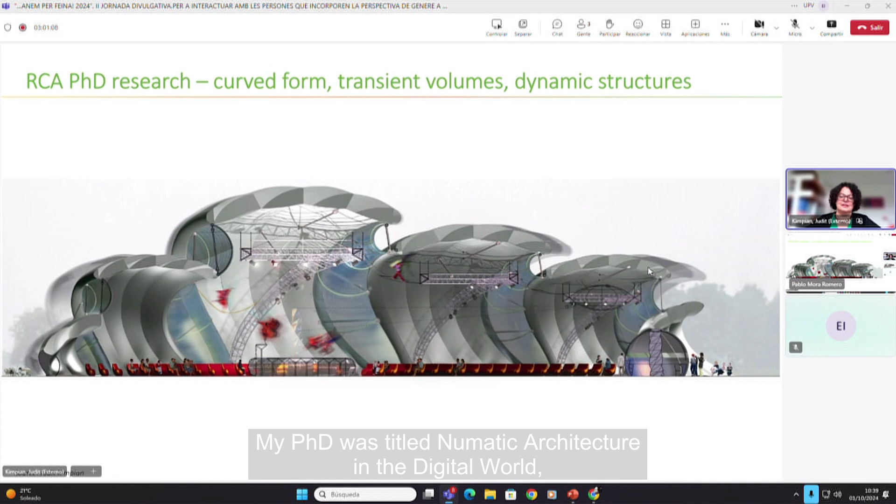So I started as an aspiring young architect looking at changing the world with quick fixes, as we like to do, creating spaces that are ephemeral, transient, easy to erect and dismantle. My PhD was titled Pneumatic Architecture in the Digital World, and it was a project-based PhD at the Royal College of Art. So while I was researching my PhD, I also worked freelance, putting my hard-earned digital skills into use to design and also manufacture sort of event architecture, exactly the spaces that I was researching.

At the end of the 1990s, you could say the architectural community was absolutely seduced by curved form. It was the first time we had the structural and the digital tools to imagine, control and build these things. I was absolutely fascinated as well with how the brain is fine-tuned to detect any changes in curvature, and why our brain is so seduced by big curves. Of course, it relates to biological issues. For example, the brain is very finely tuned to detect very minor changes of curvature and to attach meaning to them. You can imagine why that is so important.

Just interestingly, symmetry and asymmetry. A lot of biological structures are symmetrical, especially the higher organized ones. So the brain attaches an immediate sense of a living object to anything that's symmetrical. In architecture, when we use curved buildings, we often try to veer away from that.

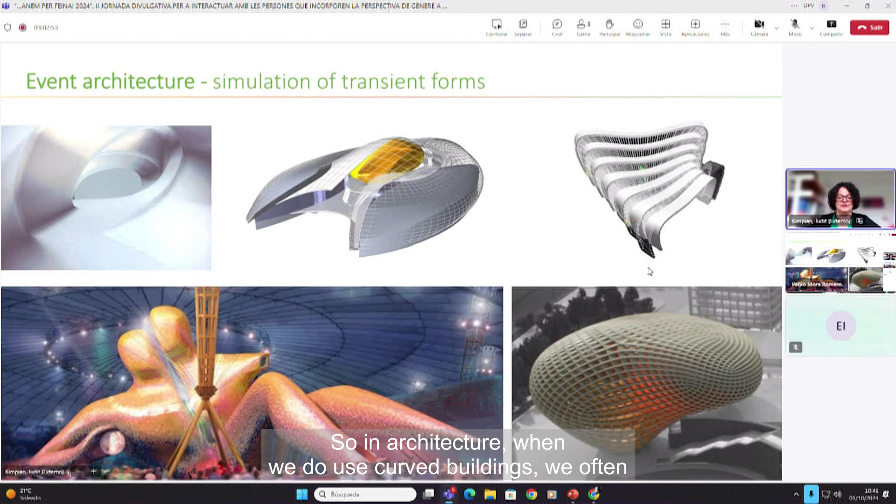Not in this case. When I worked at Foster & Partners after finishing my PhD, in the R&D group, I worked on many projects, but this was one of my favorites, because manufacturing curved form became really a possibility with digital tools. As a team member in advanced modeling, I was also simultaneously leading the implementation of basic solar and environmental analysis into the practice workflow. I had the privilege to work on this building from its very inception, so you'll see the initial computer model and then how we generated the physical model from that.

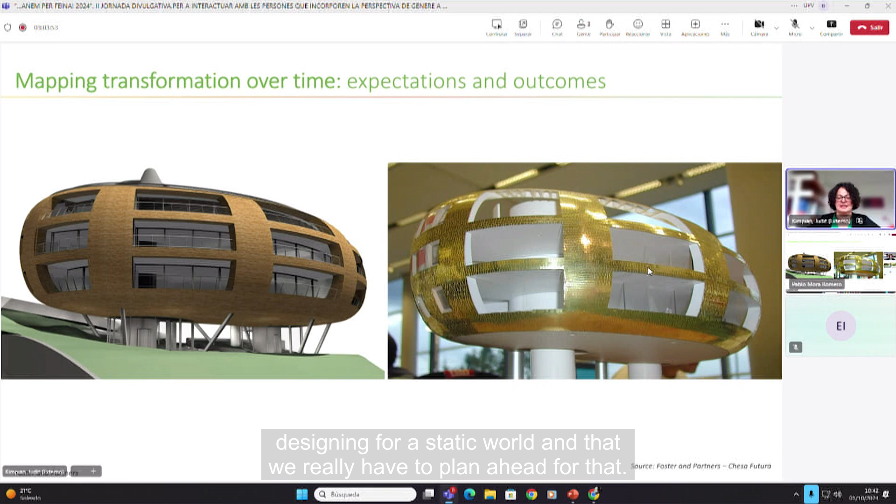Two decades later, it is a profound expression of how we are not necessarily designing for a static world, and that we really have to plan ahead for that.

So guess what's causing the patterning on the building on the right-hand side? The building was covered in shingles, and of course the solar radiation over time causes the graying of the shingles. But on the other side, you can see where the direct solar radiation doesn't hit the building anymore. Apparently Norman loves the look, but it's certainly not something that anyone anticipated.

So how do we plan for imagining buildings in an environment that is not static?

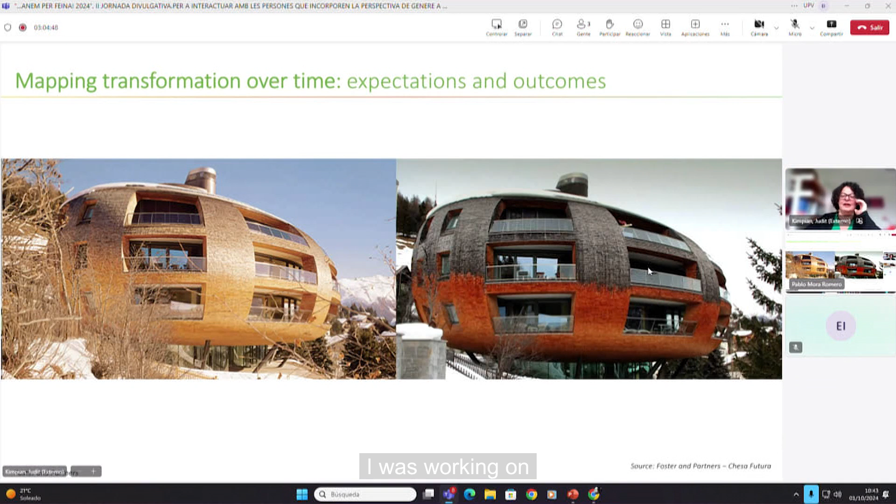My next step in terms of my career still remained with the manufacturing of curved form. I was working on this project called Dubai Metro when I became head of advanced modeling at AHR. I was in charge of the digital design and engineering coordination of 24 Dubai Metro stations.

You can talk about the animation of these projects - every single one of these stations was different. I got quite hooked on controlling these differences through digital models, which allowed me to get design decisions approved and executed, and got away with a 30-meter cantilever.

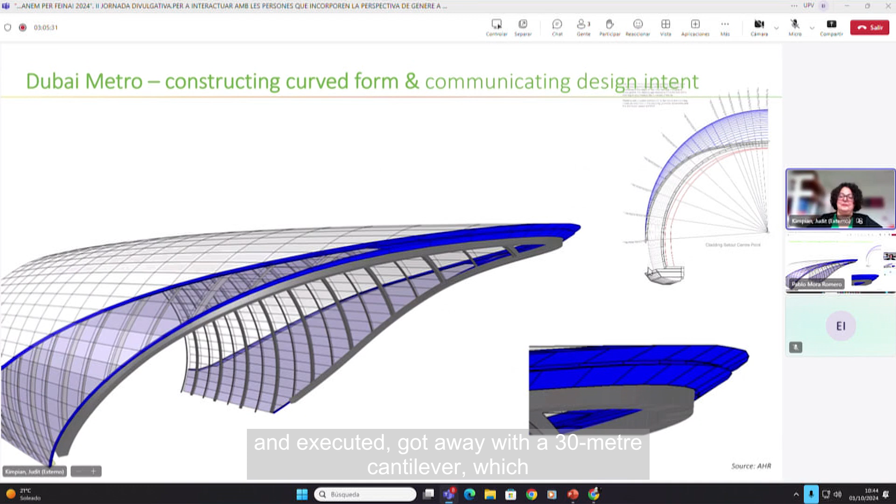You can see some of the changes in the model shape as the building animated through its development. And of course, there's nothing like standing on top of that 30-meter cantilever and checking, in 40 degrees heat, if the curvature was correct.

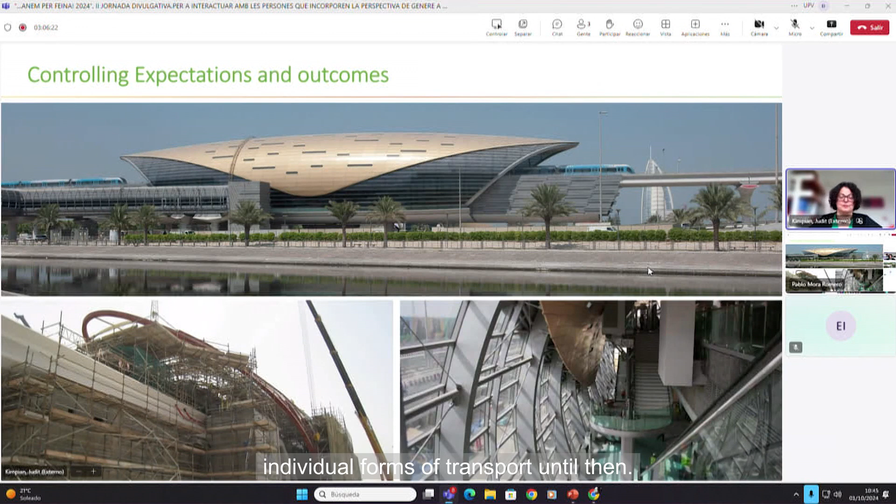But it was a wonderful project to work on because we were able to create an absolutely positive icon. It was a daring project, and it was quite difficult to get away with this form and adapt it to the different situations. It was a public project for public transport, in a country that only had individual forms of transport until then.

Then I started working with my colleague Abdulmajid Karanouh, who actually now lives in Dubai. I worked with him on Dubai Metro, and he went on to lead the design of the Al Bahar Towers in Abu Dhabi, which includes actual moving structures. Designing this building was kind of the culmination of our exploration into animated structures.

And then I noticed I always ended up being either the sole woman with 3 people, 30 people in the room, 300, or in this case on site with 3,000.

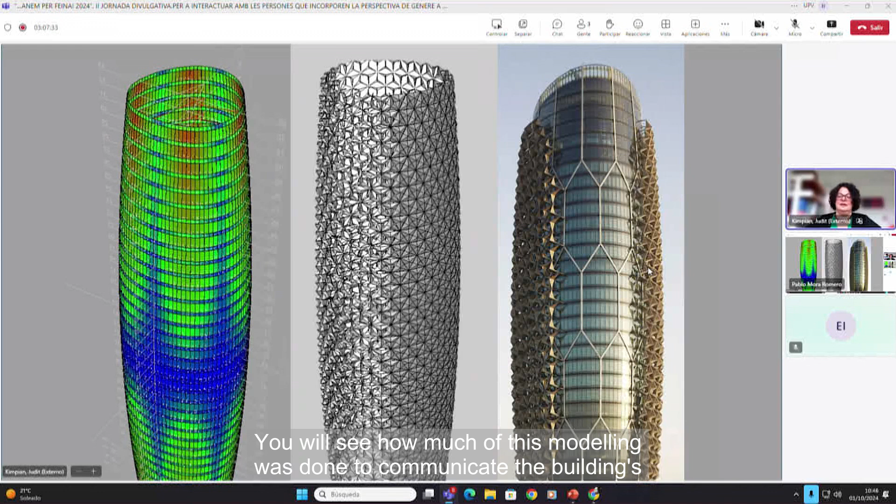I wanted to also point out how much precision-led process there was leading up to this, and the control. I keep coming back to this word of control, because it's not just a personal issue, but what we can control, we can build. So you will see how much of this modeling was done to communicate the building's form and its performance and its details.

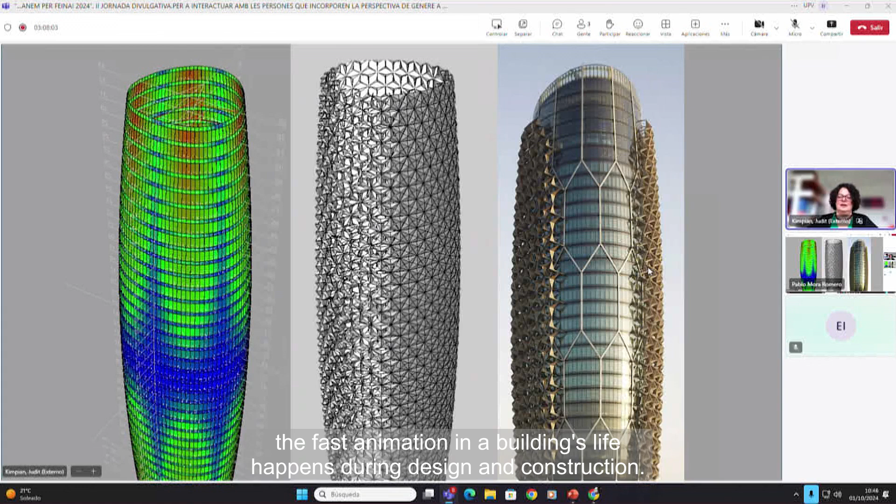All of this animation happened during the design stage. So while we're often talking about designing for an animated symbiotic relationship with nature, we also forget that most of the animation, in terms of the fast animation in a building's life, happens during design and construction. We can now use these digital tools to simulate design, construction, and operation, and not only that, but also to simulate design feedback - to plan ahead for this transformation and interaction over time.

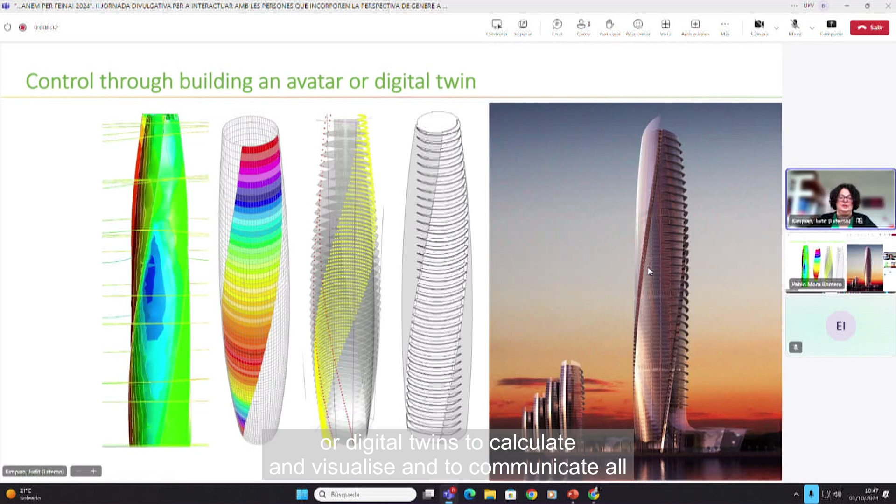Just some pictures of my last visit. Have a look at all these different models - we think of them as avatars or digital twins to calculate, visualize, and communicate all these different properties of buildings. But despite all that I learned with these projects... sorry, my cat's photobombing the talk, as she always does.

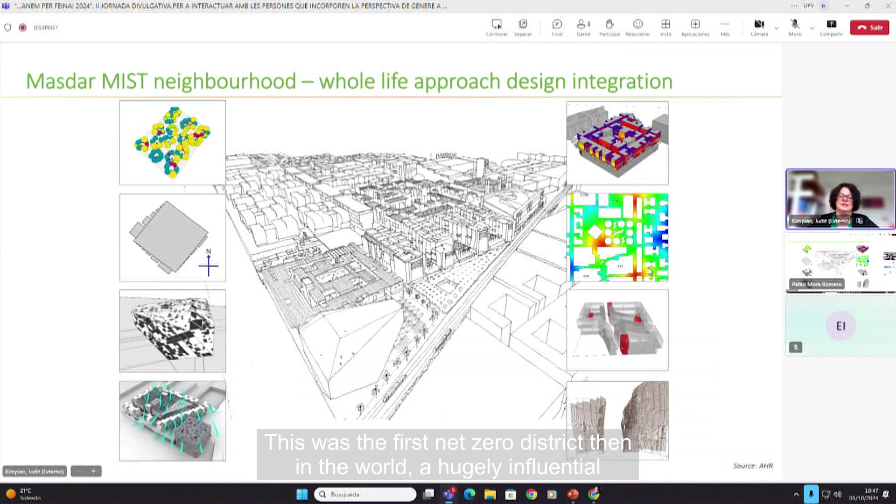The absurdity of working on tall sculpted towers under the regeneration label took its toll on me. I was really relieved to win the opportunity to work on another project, the Masdar MIST neighborhood, where I was able to put into practice the technical skill I gained for a much more human scale development. This was the first net zero district in the world, a hugely influential project in the Middle East, trying to find a way to transition from a fossil fuel enabled world to net zero.

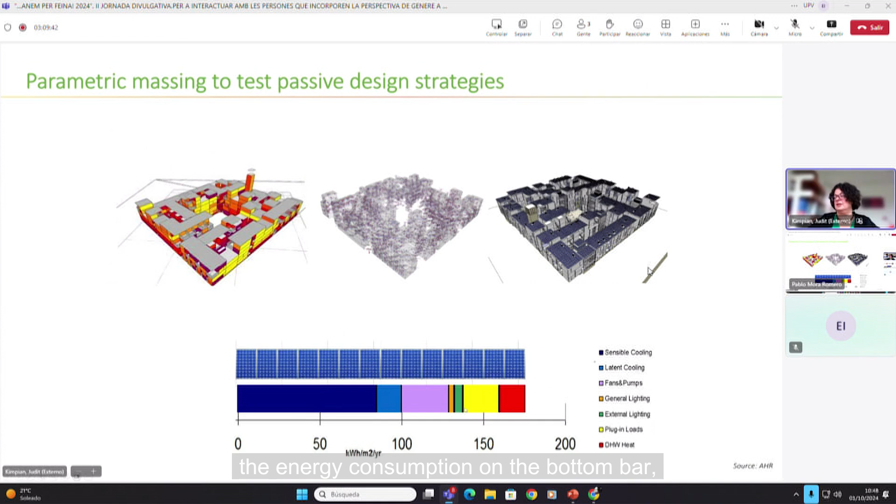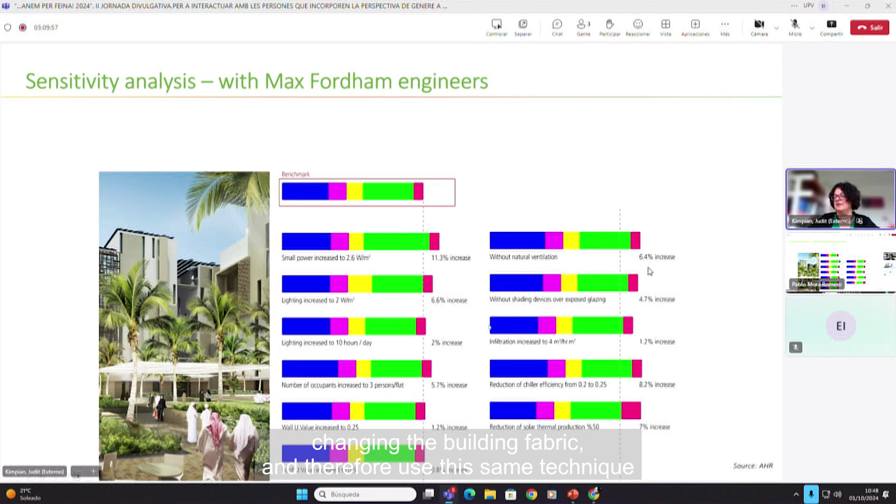We worked with these models to develop alternatives for optimizing the performance. We had to be sure that we could generate the amount of power we needed to run these buildings. This is the energy consumption on the bottom bar, and this is the amount we're generating. But not only that, we could change the configuration of the building, change how much energy we use from different sources, changing the building fabric, and use this same technique to argue for better design.

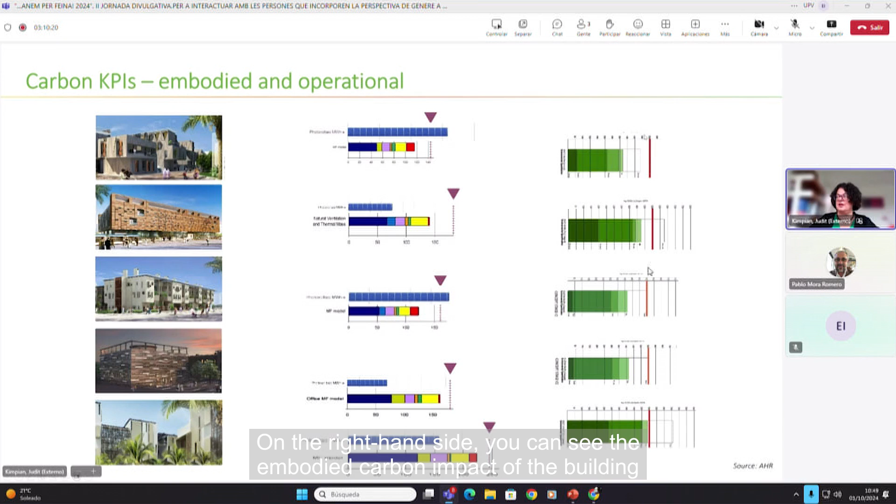What you can see here is all of these different plots, the visuals for them, and the calculated energy consumption versus the amount of power we are generating. On the right-hand side, you can see the embodied carbon impact of the building, which had to be within this limit. It was the first time I had to do this kind of balancing, and there were iterations after iterations, dealing with 5 plots. It was really a fascinating and innovative process.

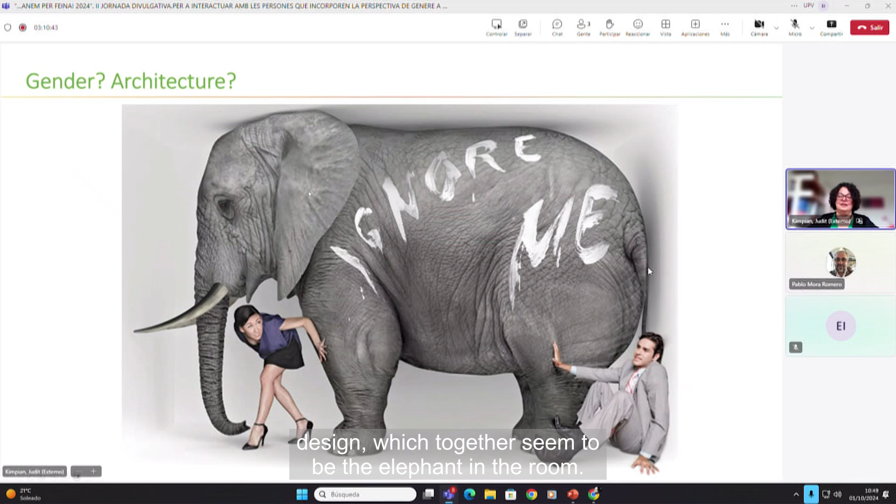But you might wonder what all this has got to do with gender and architectural design, which together seem to be the elephant in the room. Well, in architectural design, we're always balancing conflicting drivers during design, during construction, and also during operation, which we tend to forget about. What we do and how we do that balancing, not just the tools we use, but also how we communicate the various implications of those decisions, is really critical.

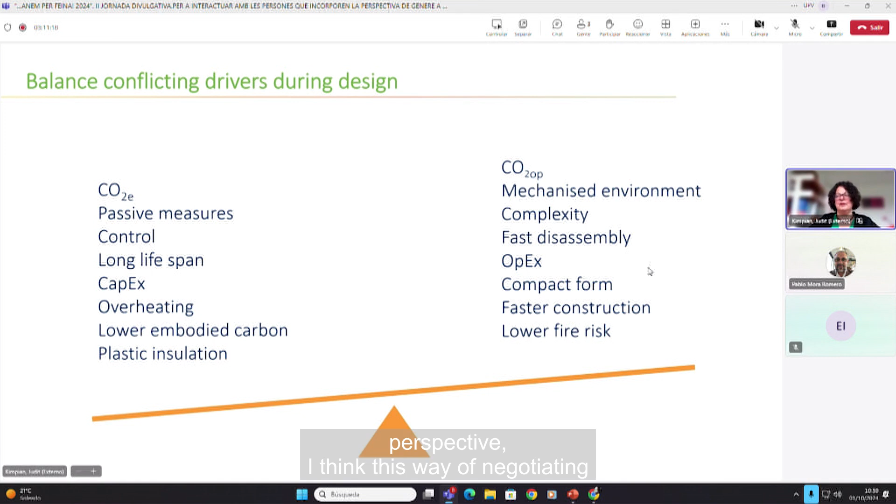It's really important that when we think of the gender perspective, this way of negotiating projects is extremely important. We are in an absolute crisis around Europe, and also around the world, in terms of housing. I wanted to mention the role of indicators, which is a really good way of seeing why we are in such a crisis.

If you look at median home price to income ratio in the UK, the US, and Bulgaria, over the past 20 odd years, prices have increased from 4 times to 8 times. So they have more than doubled.

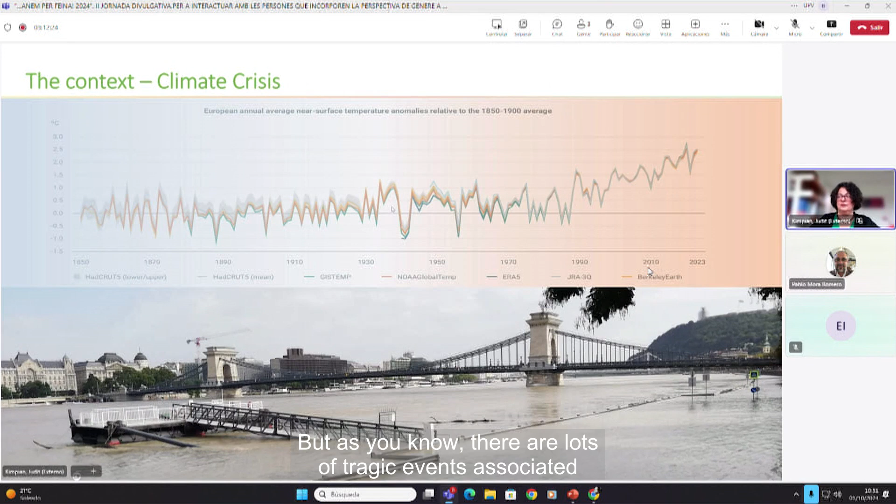I don't need to talk to you about the climate crisis, but we have incredible temperature rises causing really quite unbearable heating in cities and homes. And the frequency of unpredictable weather brings flooding, as you can see in this recent picture in Budapest. But as you know, there are lots of tragic events associated with that around Europe.

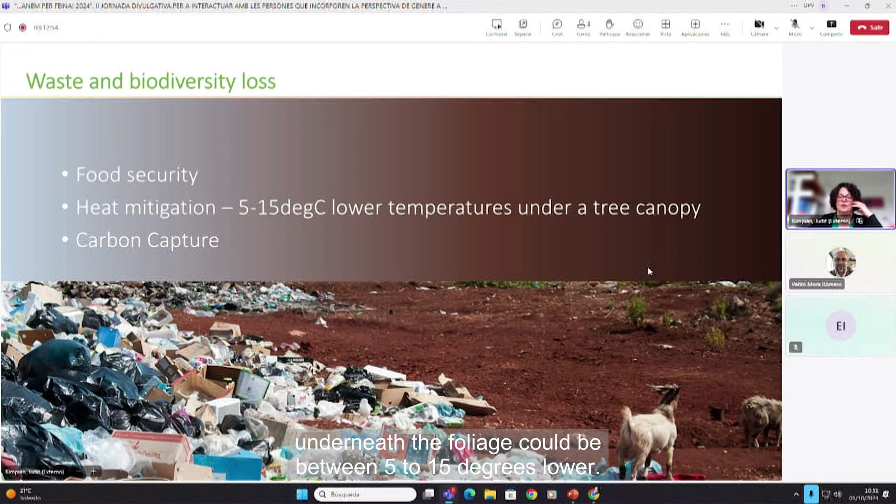At the same time, to survive as a species, we should really prevent waste and biodiversity loss, which also jeopardizes our food security. It mitigates overheating—for example, where you have lots of planting, the temperatures underneath the foliage could be between 5 to 15 degrees lower. And of course, nature is the ultimate carbon capture route. So we have to be able to do better.

I've come to realize that more often than not, women are leading this transformation, and it's amazing when men are doing the same. But this is quite a challenging journey, and there are lots of hoops to jump through. So I was thinking, what are the mechanisms in design and policy making that can help us?

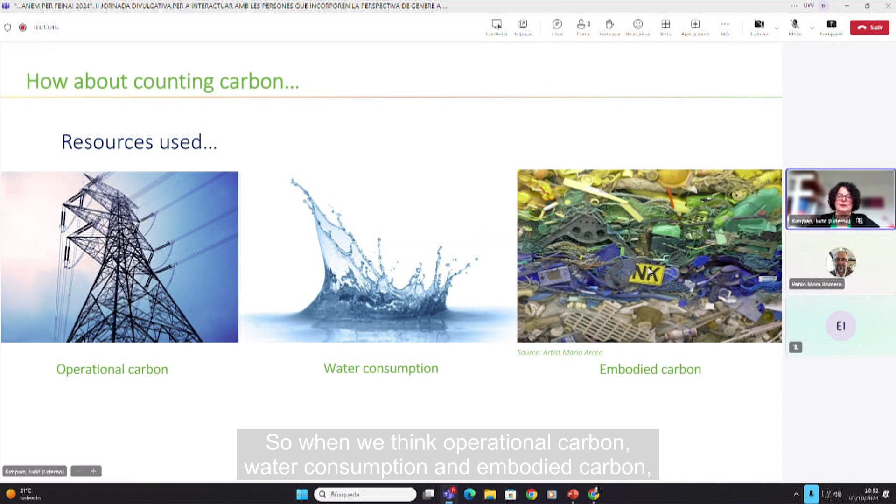My background is in counting carbon. Again, you might wonder, how is this relevant? But let me show you. When we think about operational carbon, water consumption, and embodied carbon, we're talking about the resources we use to create something with those resources—usually comfort and well-being, climate change resilience, and social and economic value. And we want to do this at a relatively low cost, especially low whole life cost.

And we want to do this over a building's lifespan, from product to construction to use to end of life, and also beyond life—how we then reuse these. Because we spend something like 90% of time in buildings these days, and almost all of us 100% in the built environment.

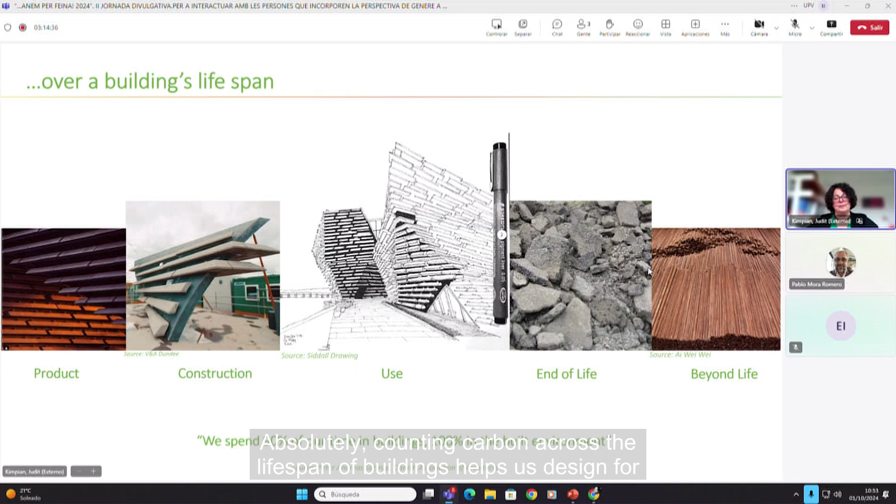Counting carbon across the lifespan of buildings helps us design for the way people use buildings. I'll try and give you a few examples.

Counting energy, tracking energy use, really helps us discover what works. Energy is effectively counting effort. The more architecture is doing its job, the less effort a building needs to exert to keep its occupants comfortable, healthy and productive. Ultimately, effort equals energy use.

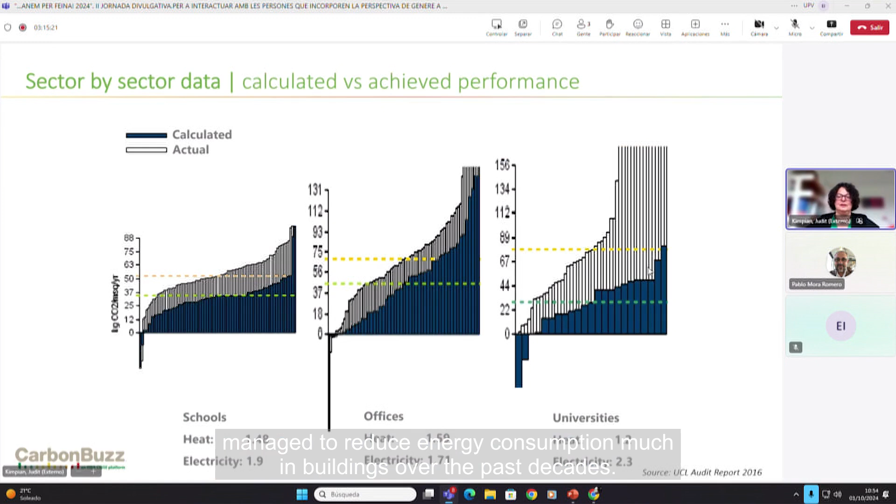In the EU, 40% of emissions relate to energy use in the building sector. So despite large-scale decarbonization of the grid, we have really not managed to reduce energy consumption much in buildings over the past decades.

Not only that, but in this graph, from a study we did in the UK, we created an online platform so people could log what they anticipated they were going to be using in terms of energy, which is the blue graphs, and then these are the measured performance. As you can see, the measured performance tends to be sadly much higher than what we anticipate.

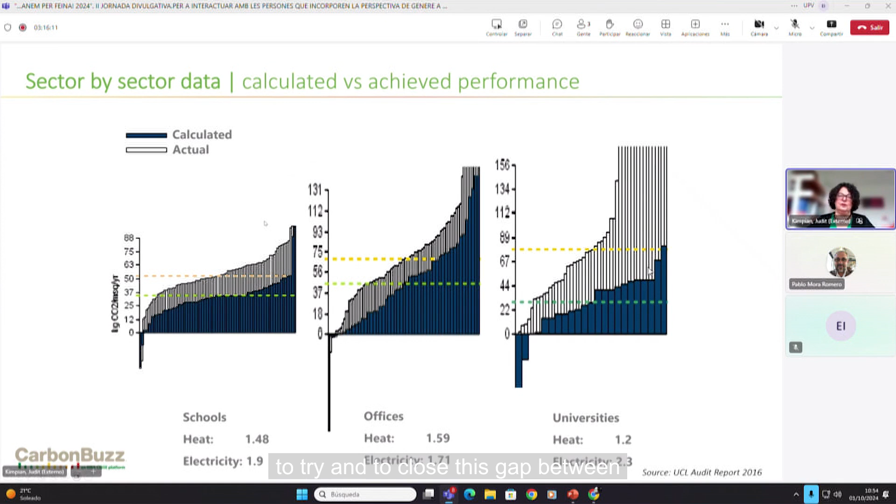So together with my colleagues, we secured funding and persuaded lots of stakeholders to enter the data. This created massive momentum and allowed the government to start a new research stream to try and close the gap between anticipated and achieved performance.

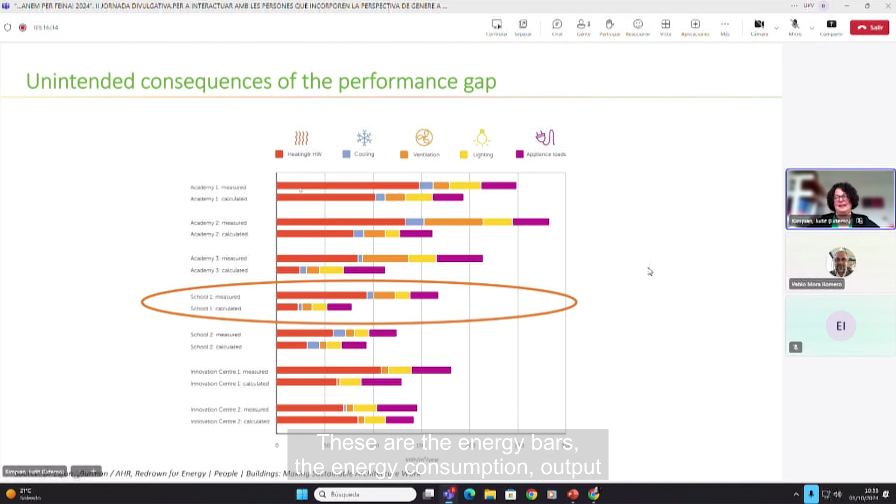These are some of the buildings I was leading the study for, and the insights were fascinating. Look at this building, for example. These are the energy bars, the annual energy consumption in kilowatt hours per meter square per year for each building. The top bar is what is measured, and the bottom is the calculated. So what are the causes of all these gaps?

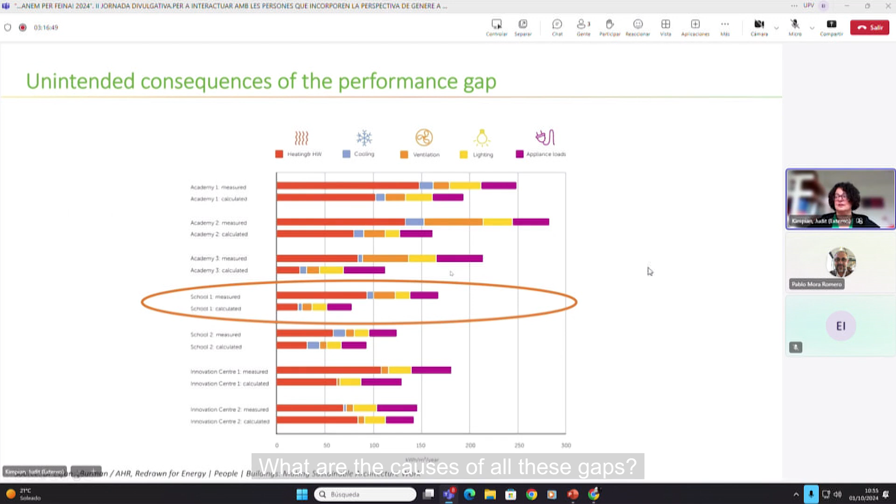If we look at one school, we found that complex systems present a big risk to construction quality. I don't know how many architects in the room would understand how building management systems, BMS, work. Usually you have temperature triggers and carbon dioxide level triggers that measure air quality, and automated openings are set based on what values you reach.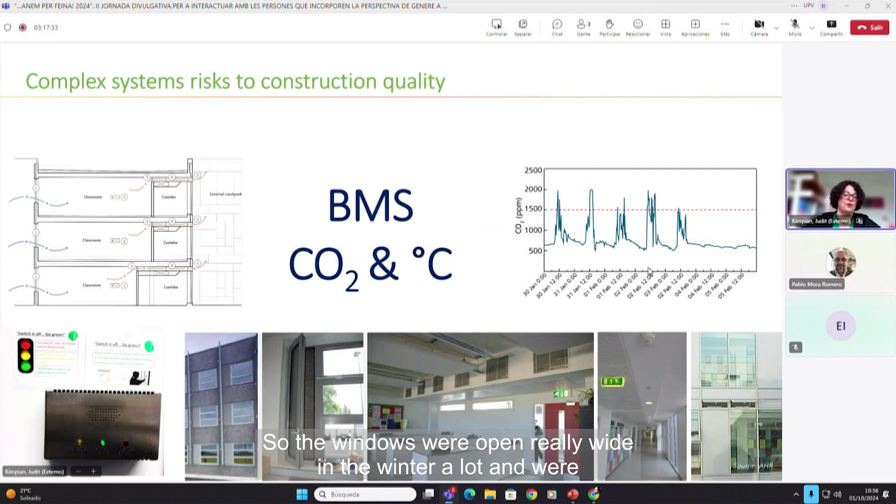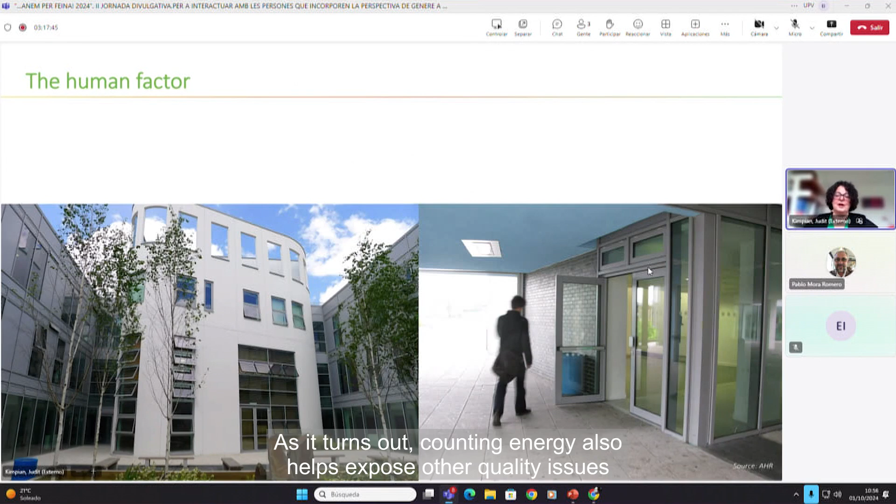In this case, they forgot to commission the temperature triggers, so the windows were open really wide in the winter a lot and were absolutely shut in the summer. So there was no cross ventilation. As it turns out, counting energy also helps expose other quality issues in buildings too.

So take a look at this door. It seemed like detective work at the time, but we really wondered why this building was using so much energy in the winter for heating. Well, this door has a little latch here, and it came with a £1.50 or €1.50 Allen key to withdraw the latch.

Because it's a security door, it closes all by itself, but if you withdraw that latch, people can use it to circulate. The building manager didn't know this, so he kept it open all the time. As a result, a gale, a wild wind was blowing through all of the ground floor all year round. No wonder the building could not heat without much, much more energy.

Which made me think about how many of these interface design issues between buildings and people we get wrong as an industry, and how we can think more about our end users instead of the sterile photos featured in magazines. This is where we began having conversations with Eva, where I think we have a similar interest in the end users of our buildings, and the methodologies we use to map these end users.

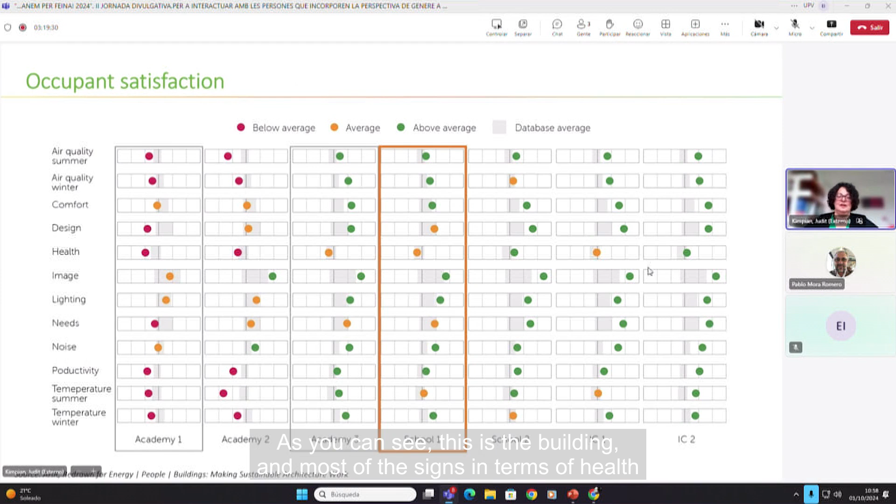This is a graph of an occupant satisfaction survey result in the buildings I just showed. In a well-designed building that otherwise meets occupants' expectations, energy use can step up to overcome basic thermal comfort issues. As you can see, this is the building, and most of the signs in terms of health, design and image are all green. So the extra energy consumption managed to cover up those issues.

These are the titles. And interestingly, this type of feedback can offer other insights too.

Take these two academies. They were very close to one another, with similar climates. We were measuring the heating—the temperatures and the CO2 levels, so air quality—within these two buildings. This building had all of these meters green, and this one had all of them red. Strangely enough, the measurements were almost exactly the same. The difference was: people are very happy with the design and how it meets their occupants' needs in this building, but in this other building, they're not.

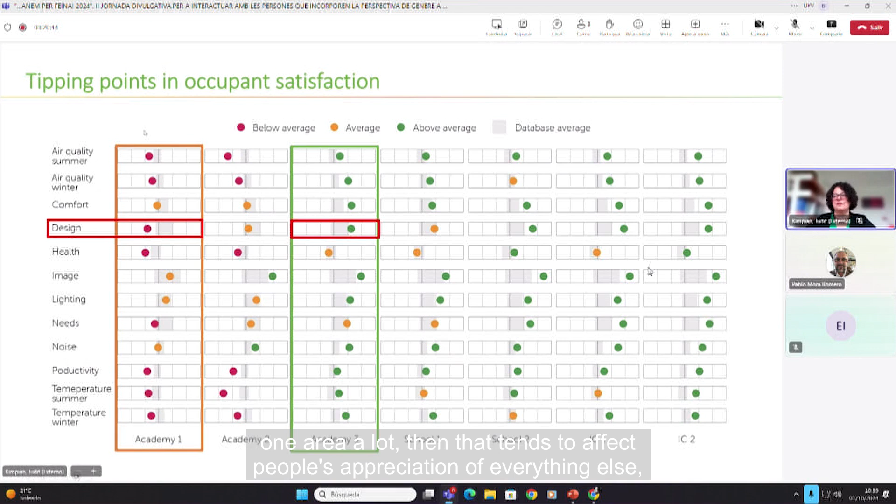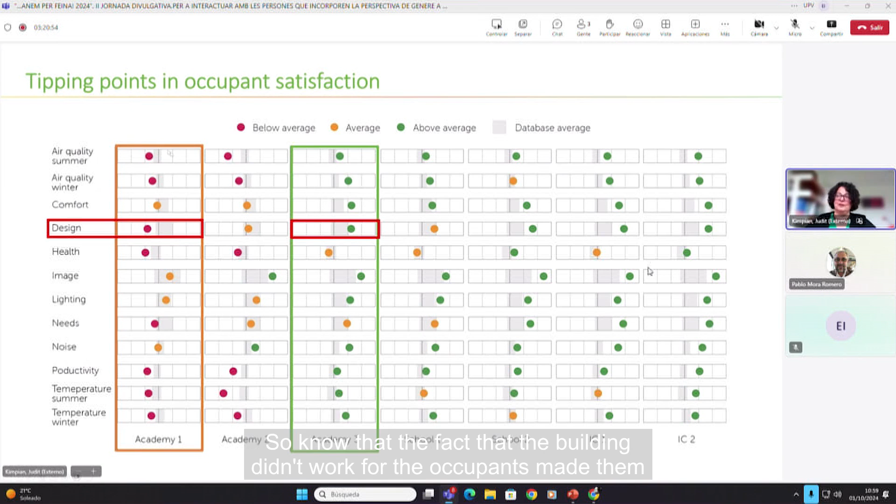They tried to create this open plan teaching, which was an absolute acoustic nightmare for the occupants. What we often find is if the building doesn't meet the occupants' needs in one area a lot, that tends to affect people's appreciation of everything else, even if the empirical measurements for those are the same. So the fact that the building didn't work for occupants made them feel the air quality was not good, their comfort levels were poor, and temperatures were uncomfortable, even though these were the same.

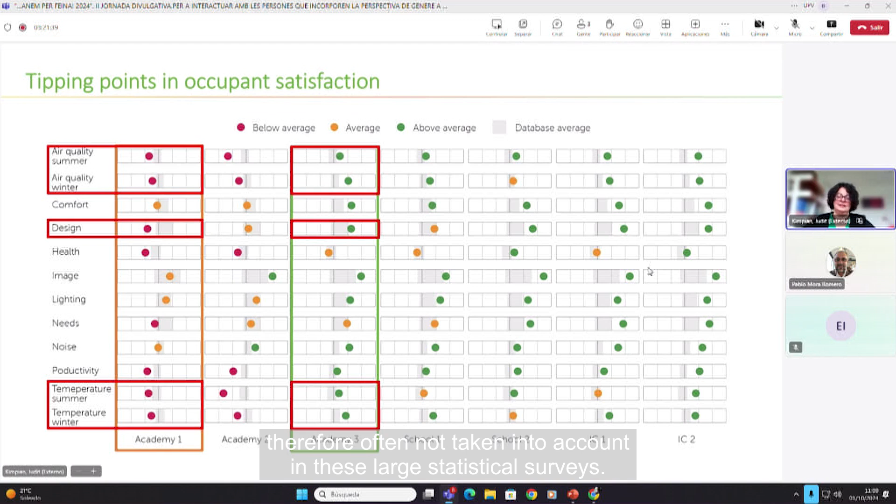I really want to highlight one thing I'd like to revisit about these studies: in these statistical surveys, we rarely drill down to look for clues about satisfaction of different subgroups, different genders, different ethnic backgrounds, neurodiversity. These are people who tend to be in the minority, and their responses are therefore often not taken into account in these large statistical surveys. This is something I'd very much like to promote in the future, and I'm trying to work with others interested in this area to advance this at European level too. So watch this space.

One other thing about the gender perspective - I tend to look at things in terms of how long they're going to work, hopefully how little effort I have to put into keeping it working, and how little funds I have to put in to keep it working.

A very common mistake in construction is not to take into account thermal bridging. Thermal breaks are tricky to build, especially into an undulating tower like this. But it's a really good example - quite a well-known example - for the extent to which you end up heating the outside, but also the amount of damage that thermal bridging can cause to indoor air quality through mold, and in some cases it can damage the structural integrity of buildings.

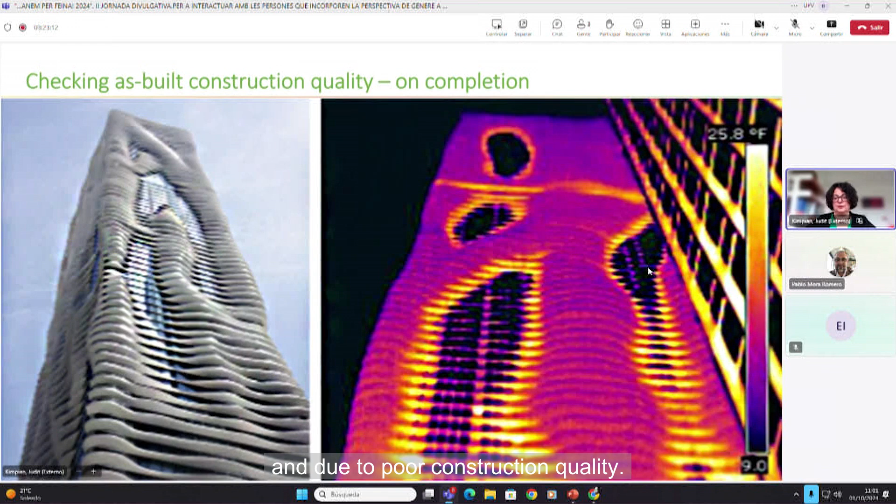I didn't really want to mention Grenfell Tower today, but this kind of thermal control and way of controlling quality should be transformative in preventing accidents due to poor construction quality. And I know in Spain there's been a recent tragedy similar to the Grenfell Tower tragedy. So controlling quality, controlling thermal comfort, controlling construction quality, controlling energy consumption are really good clues in...

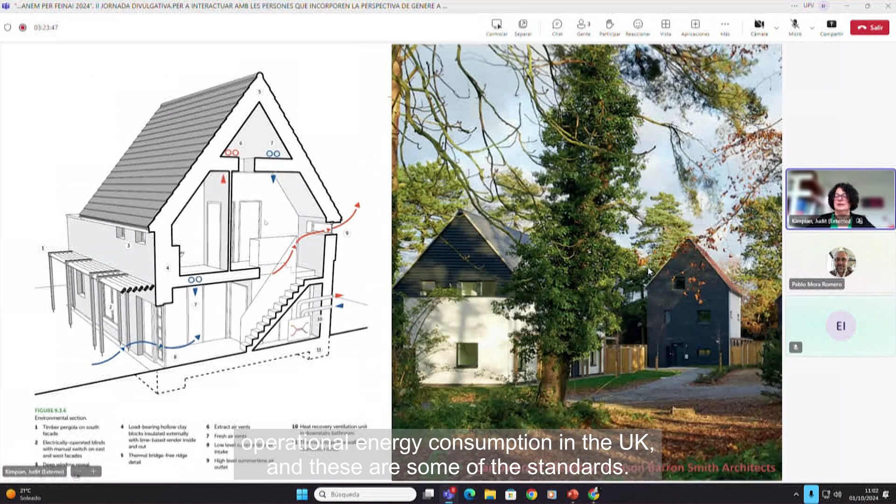avoiding such construction issues. So we really place a very big emphasis on verification of operational energy consumption in the UK, and these are some of the standards. I wanted to show a few examples from this. These examples come from my book.

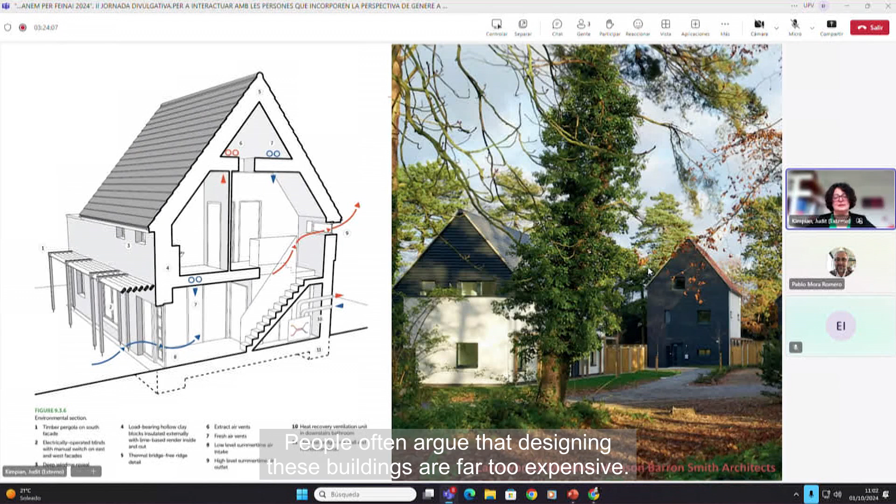This is a UK passive house project called Carrowbreck Meadow, designed by Hamson Barron Smith. People often argue that designing these buildings is far too expensive, but this had a cost of €1,800 per meter square - this is at the very low end of home construction, I think, particularly social housing in the UK.

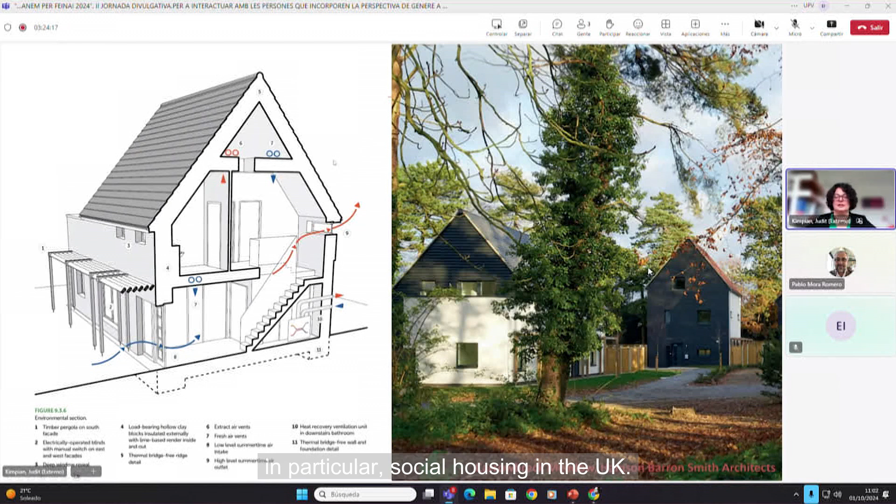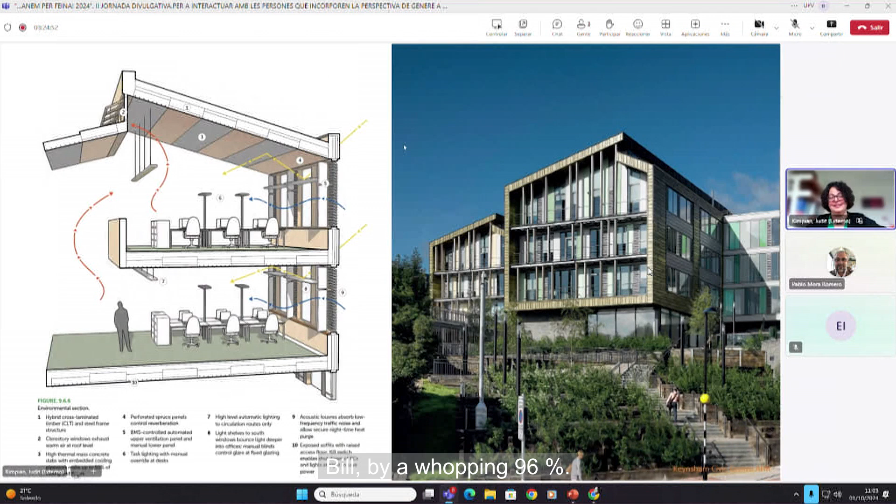All of the following projects targeted operational performance, meaning in-use consumption figures measured after a year of the building being up and running. Keynsham Civic Centre is a project I worked on quite a lot. It's a public building which targeted an operational rating, meaning energy in use from the start. We managed to reduce the council's energy bill by a whopping 96%. And the occupant feedback from this building, also from both genders, which I'm very proud of, is consistently positive.

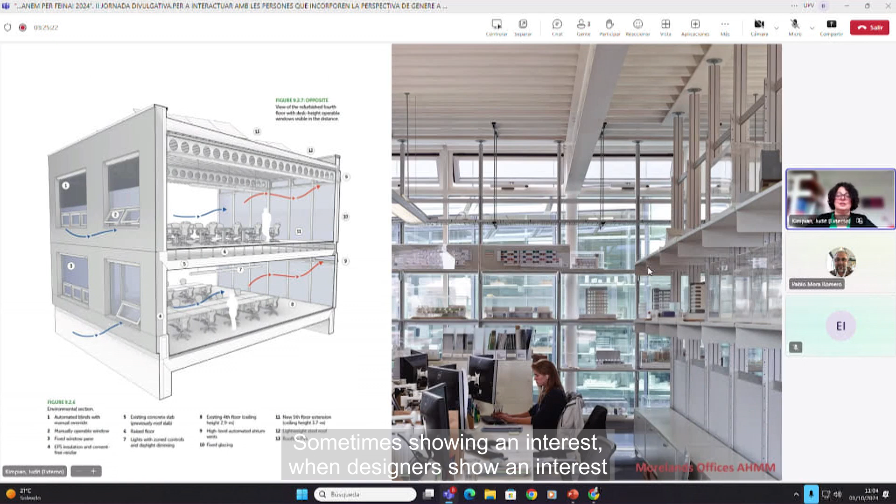Another project, AHMM's offices - on this retrofit project, the practice also did really extensive occupant satisfaction surveys, which contributed to raised occupant satisfaction too. Sometimes when designers show an interest in the building, it triggers positive feedback from users too. But this study also helped identify how occupants interact with the building fabric, which in this case was really crucial to the building's healthy and energy efficient working.

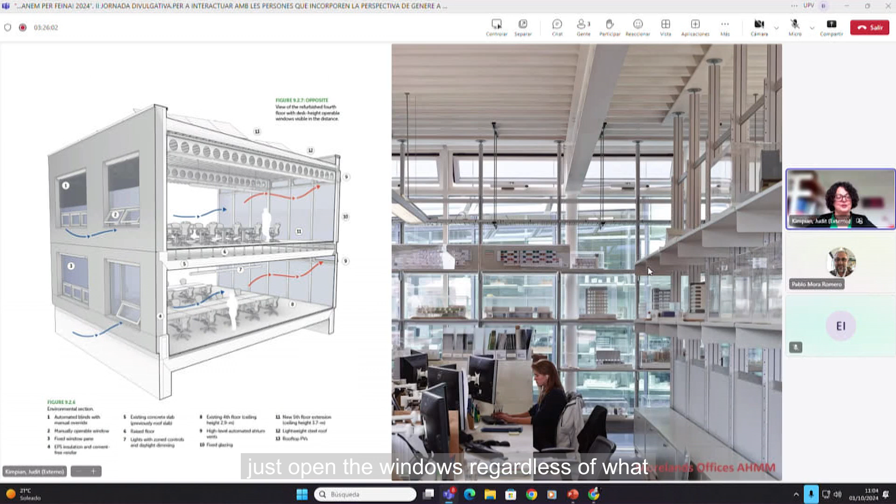For example, we find that when the building reaches 26 degrees, occupants just open the windows regardless of what they're told, because they just want to feel the air movement on their skin. Important point when designing passive cooling and ventilation in a building.

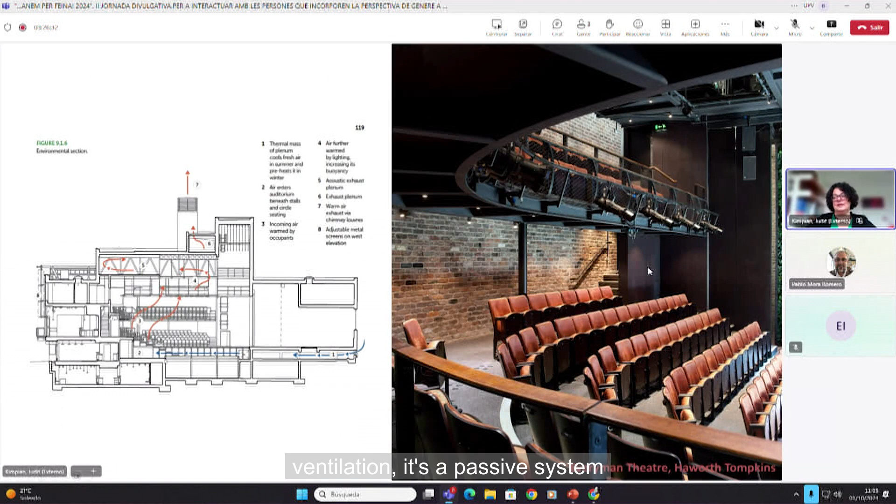When we carried out the post-occupancy evaluation on the Everyman Theatre, the architects Haworth Tompkins learned a lot about the resilience of building finishes. But also, if you look at this plenum ventilation, it's a passive system that pre-cools or preheats the air coming into the auditorium of the theatre, which was a risky design move, but it's working really spectacularly well. And this building, the Rocky Mountains Institute headquarters, is also built to Passive House standards.

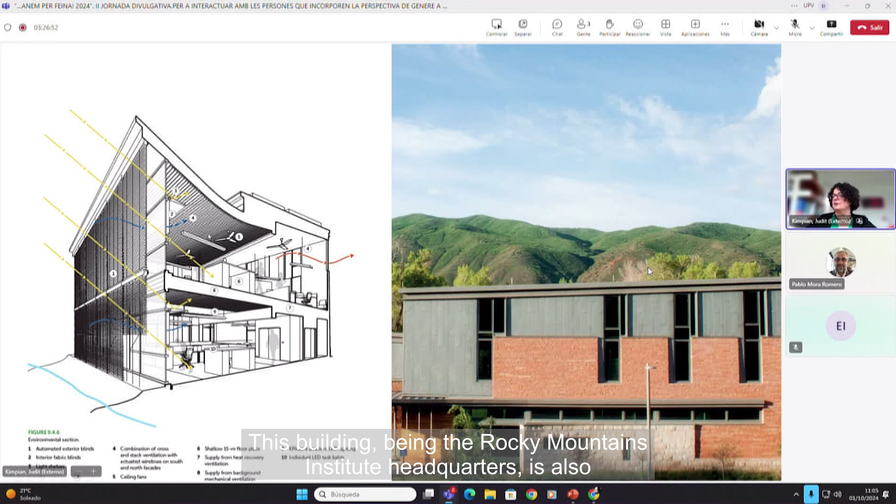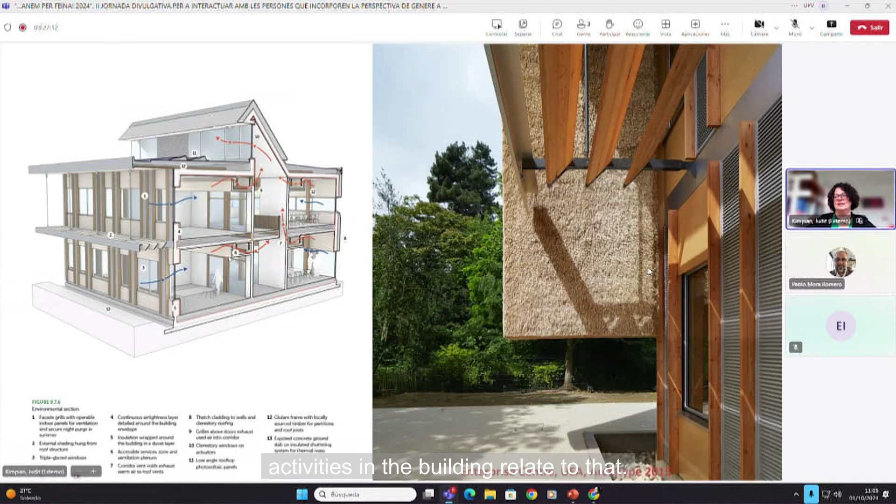Note how the building—we really like illustrating the strategies with these cutaway sections so that you can get an understanding not just of how the building interacts with the environment, but how people's activities in the building relate to that. Archetype's Enterprise Center doesn't just meet Passive House limits, it's also one of the lowest carbon footprint buildings in the UK.

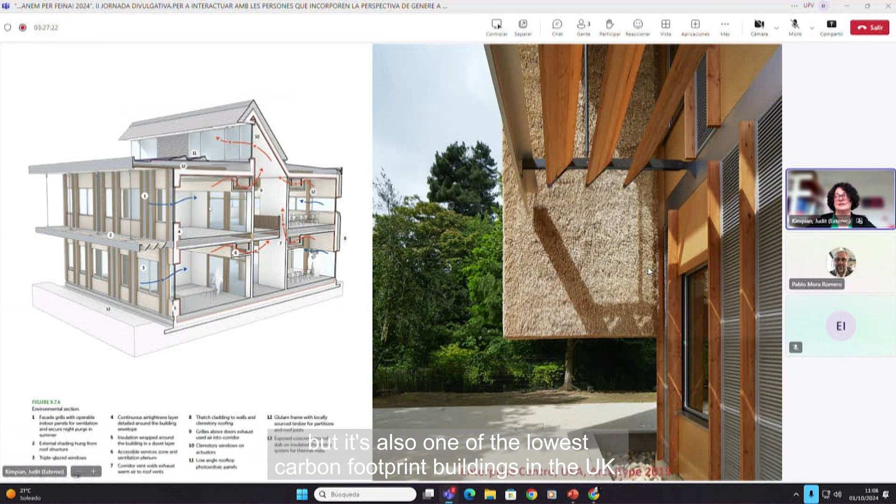It's got one of the lowest embodied carbon figures. And what we learned from this project is that we absolutely need more inspiring, beautiful buildings with data that shows these buildings really work.

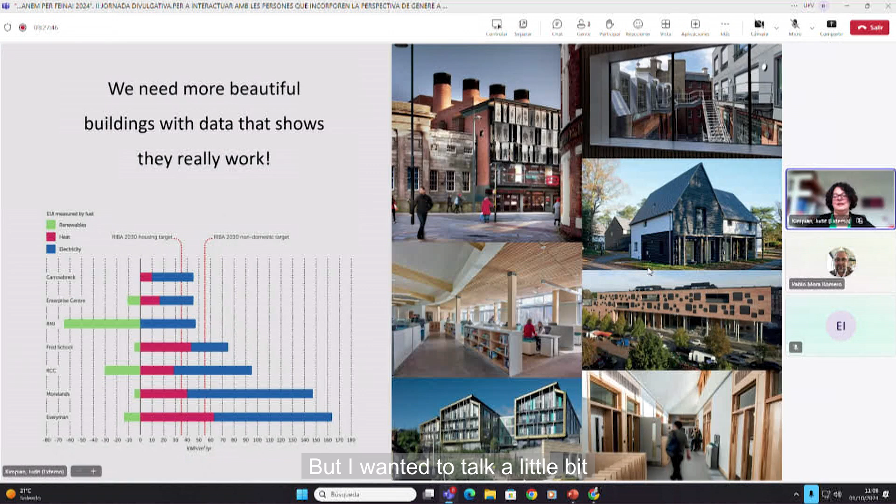Now, I'm not sure how I'm doing on time, but do tell me to finish when you do. But I wanted to talk a little bit about materials as well, and their impact.

There are two new books out, which are both amazing. One is by my fellow author Hattie Hartman and friend Joe Jack Williams, on materials environmental primer, and Duncan Baker Brown on the Reuse Atlas, which again has lots of case studies.

What does counting embodied carbon do for building quality and users? Well, it means cradle to grave thinking. Most of the building's carbon footprint is in the manufacturing of products, but it is also in the maintenance and the reuse and recycle phase.

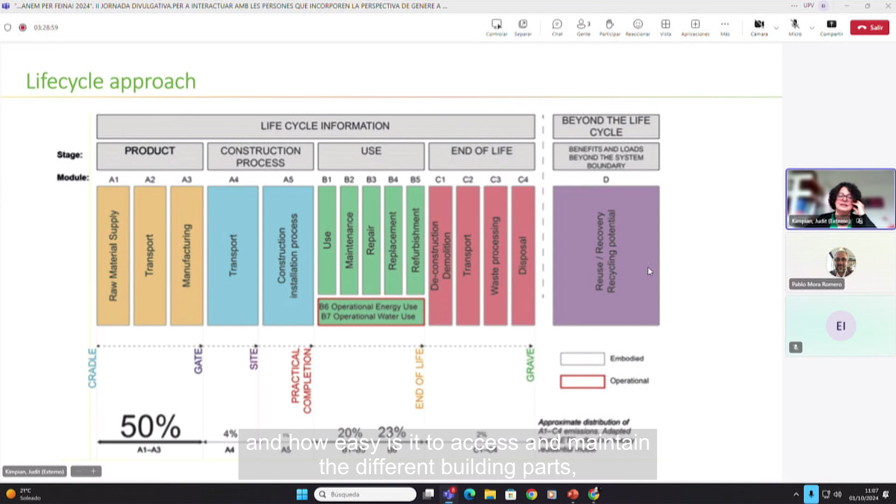When we start counting embodied carbon, we start looking at the kind of materials we use, how well they last, how often we have to replace them, and how easy it is to access and maintain the different building parts, which is a really healthy way of looking at buildings.

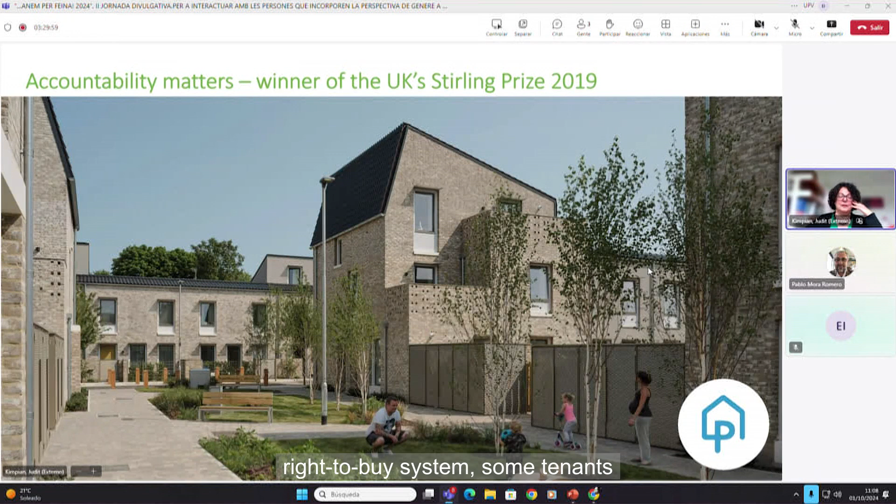It is possible to build high-quality social housing at a manageable cost. Unfortunately, in the UK, because we have this strange right-to-buy system, some tenants have the right to buy these buildings, which means we have a very low social housing stock in the UK.

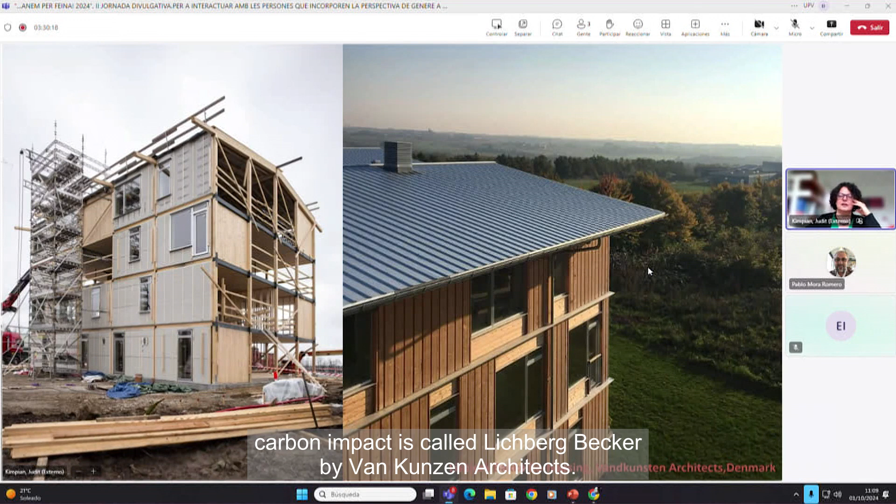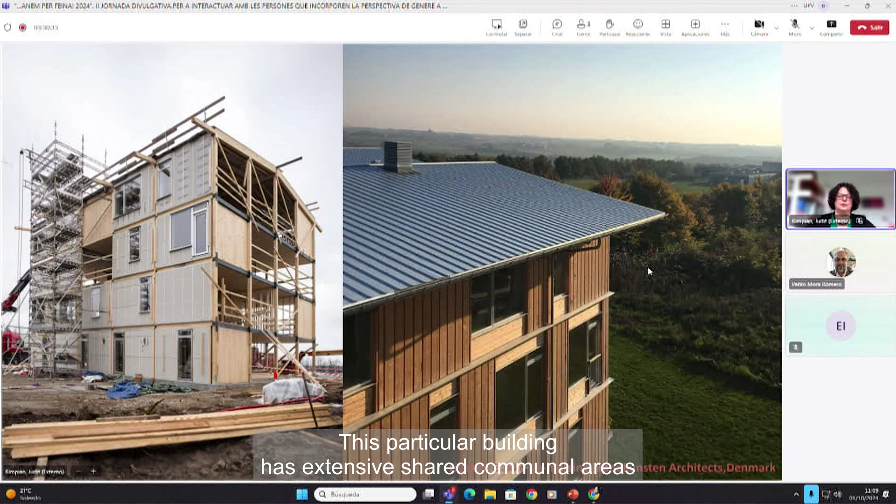Another building with similar embodied carbon and similar operational carbon impact is called Lisbjerg Bakke by Vandkunsten Architects. It's a co-housing CLT project completed in 2018, thinking about new housing models with shared spaces. This particular building has extensive shared communal areas to reduce the cost per square meter for the whole building.

Another project, Spreefeld in Berlin by fatkoeln Architekten, a self-built Passive House project. And so I wanted to just flag to you the wider framework that we're trying to implement in Europe called

the EU Levels Framework for Sustainable Buildings. It looks at greenhouse gas emissions, material impacts, water consumption, the resources that I showed you with the images before, and also what we try and achieve in terms of indoor environmental quality, climate change resilience, and cost and value.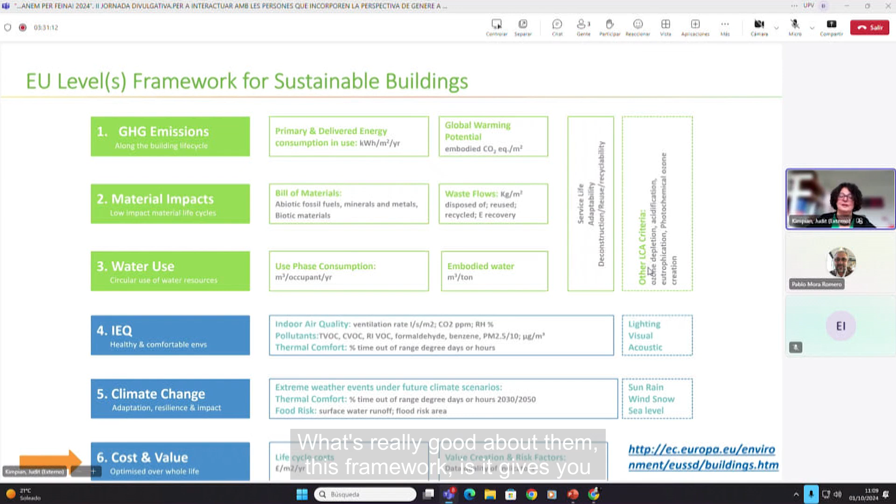What's really good about this framework is it gives you the metrics of what to monitor. But we absolutely mustn't forget the qualitative metrics, the qualitative indicators for empowering architects and built environment professionals to build high quality architecture.

This is the Baukultur Davos 8 criteria. The professionals behind this movement were really keen to find the metrics and standards to promote high quality architecture in public procurement, in energy legislation, to really provide policymakers with the right hooks to enable this to happen.

Baukultur, I wanted to highlight how it talks about the gender perspective, gender equitable places, inclusion for all, human rights and safety, and mix of users and connecting people. I really recommend having a look yourselves at the Baukultur Davos 8 link.

And not to forget that this kind of quality system underpins the new European Bauhaus movement and value systems. So co-design and participatory processes, as well as the shared, safe public realm, are central to these movements.

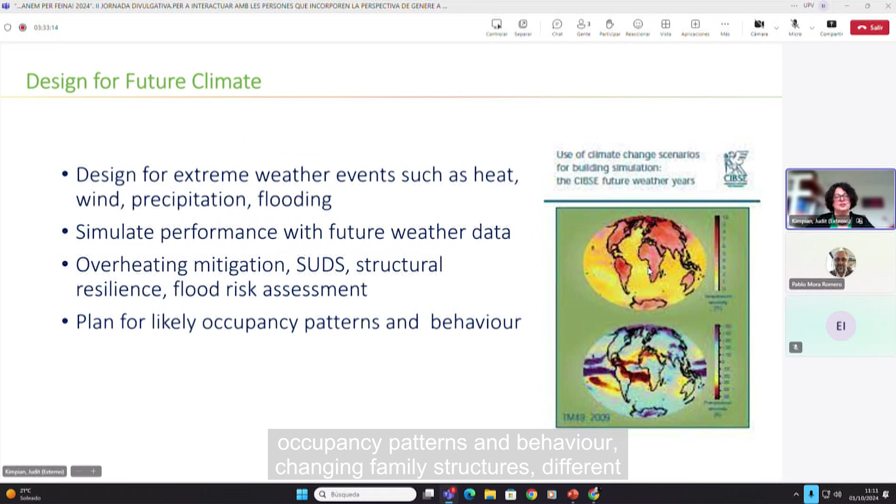This is one of the most important points for the gender perspective: to plan for likely occupancy patterns and behavior, changing family structures, different roles in households, and how those pan out. For example, taking my mother-in-law in to look after herself—I needed to look after her for a while when she broke her leg. We needed an extra room in our house, and being able to transform the spatial configuration was really helpful.

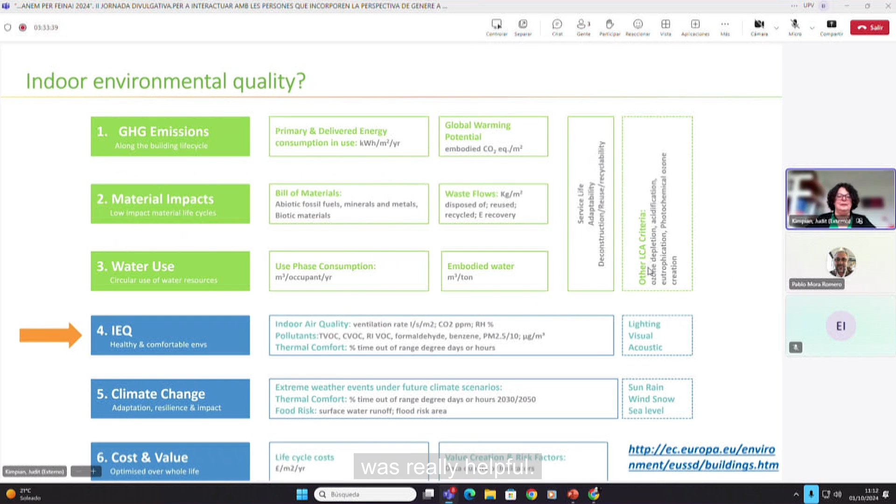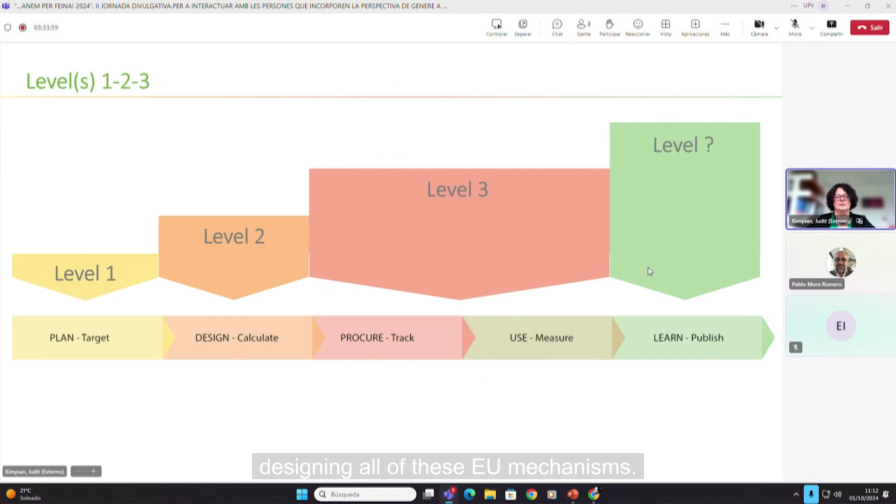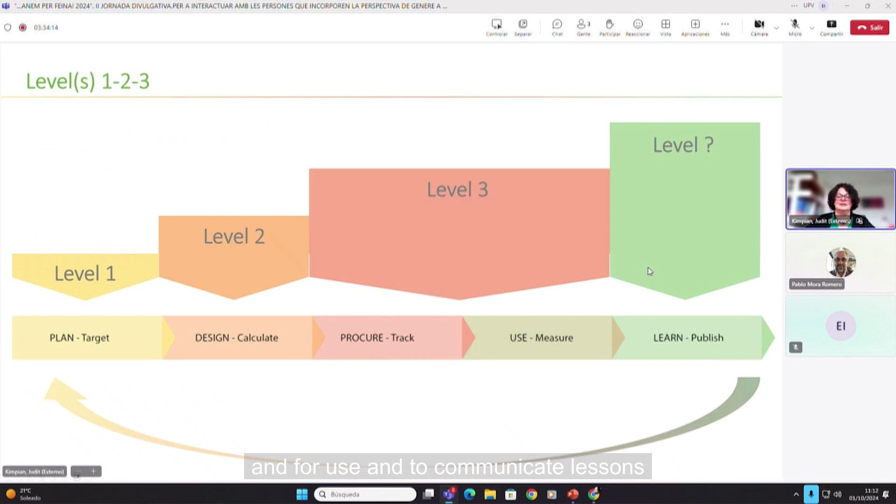Just a quick one about indoor environmental quality: how different people experience all of these indicators differently, and how we can plan for that. And just to remind you, this levels framework is really now underpinning all of these EU mechanisms, and it's one of the only frameworks that has a strategy for briefing, for design stage, for procurement stage, and for use, so we can communicate lessons learned and improve.

Just very quickly, designing for feedback. This whole idea about the feedback loop, improving and quickening our innovation cycles—we do need feedback. What's worked really well? What's helped improve productivity, the attendance rates in schools and in buildings? How can we reduce staff sick days, and what's helping property values? I'll show you a few examples.

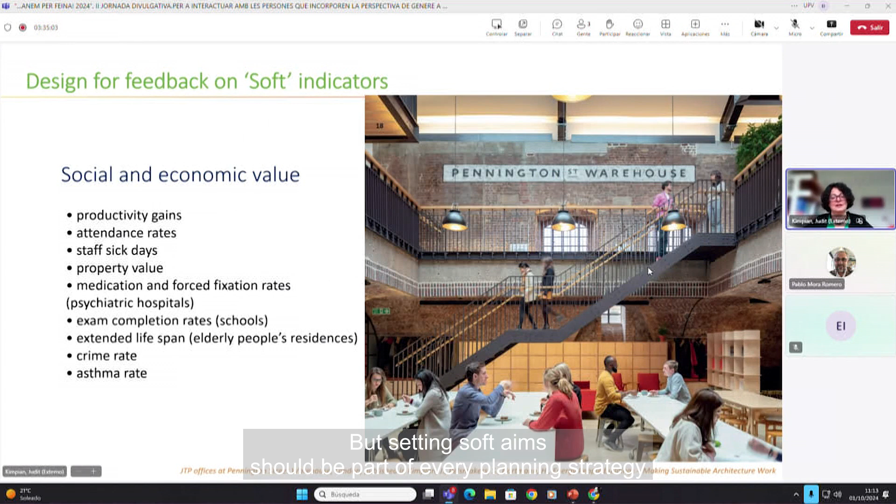We call them soft because they're often really hard to evidence, and causality—the why—is even harder to establish. But setting soft aims should be part of every planning strategy and project brief.

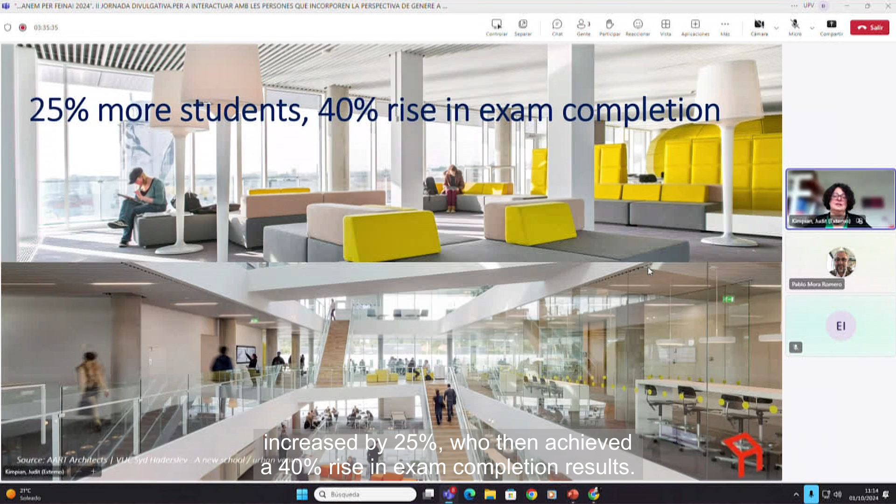I highly recommend reading Linnea Espersen and Peter Andreas' free-to-download book—this is where these particular case studies come from. While I'm not sure how to formulate the indicators for gender inclusion, I'd be very happy to hear your thoughts on this. For example, we always discuss with Eva having gender-balanced jury members for awards and competitions as an absolute basic, as well as for planning decisions. This would be a really good start.

For now, I'll leave you with the brilliant news that our work on the UK's net zero carbon building standard is coming to fruition. We've just launched a pilot for the standard last week. This will be the first UK standard that will set out a way of really robustly proving that a building is net zero carbon, and that it is in line with the UK's carbon target. So what we have as a carbon budget for the UK and what we do as architects has to come together in the middle. Some very bright and motivated young people have managed to create these limits, and we have now launched them.

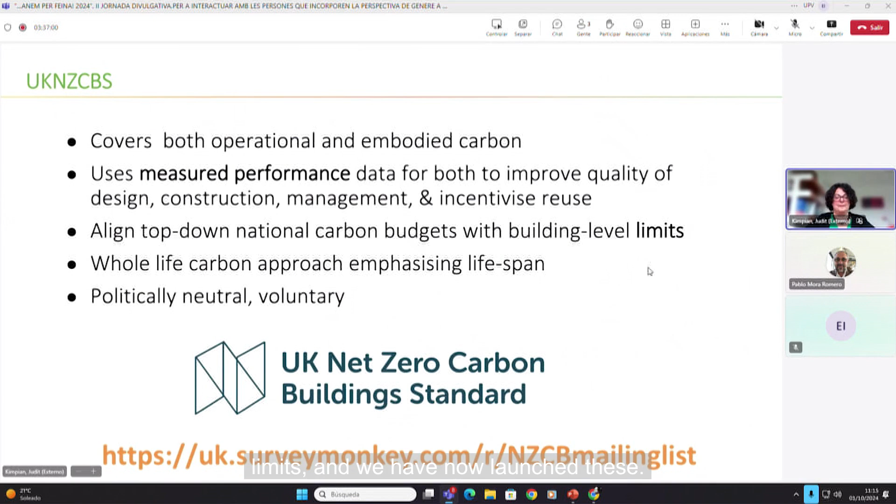You're free to sign up on the website, and don't hesitate to take another look at my book, which you can purchase from the RIBA bookshop or Amazon—it describes the principles I've just been discussing. You're also welcome to listen to the podcast by Hattie Hartman; she runs the AJ Climate Champions series. You'll hear from many others who are working on creating a more equitable built environment that works for all. Thank you, any questions?

Hi, Judit. I was suffering because I find your lecture so intriguing and so exciting every time I hear it, but it was a bit too long for the students today, and I'm so sorry. Do you have any question for her? I have many questions for you, but I think I'll talk to you directly—we can talk another day. If they have any questions in class, I'll forward them to you. Thank you so much, sorry to take so much of your time, I'll leave you to your day, have a wonderful conference, and I can't wait to catch up.